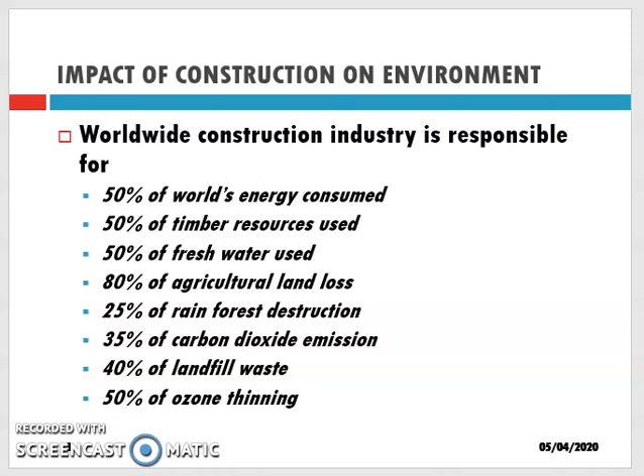Sustainable construction is the adoption of materials and products in building and construction that will require less use of natural resources and increase the reusability of such materials and products for similar or same purposes, thereby reducing waste as well. Sustainable construction or building also enhances the resilience of the industry, as such materials are readily available in the world market. Sustainability means a lot in construction business.

It means ensuring that resources are being used in an efficient way in our projects. It means considering the environmental impact that are created by the way we source materials, the processes we use to get the job done. It means understanding our projects not just regarding the bottom line and the benefit to our businesses, but also in terms of the impact to the environment, the community, and the world.

The simplest way to understand sustainable construction is concerning who are the stakeholders in the given project. If your firm is hired to construct a building, there are already several stakeholders involved: the client, your firm, and the local government that regulates construction in the area. They are all stakeholders, and they will influence the process and outcome of the project.

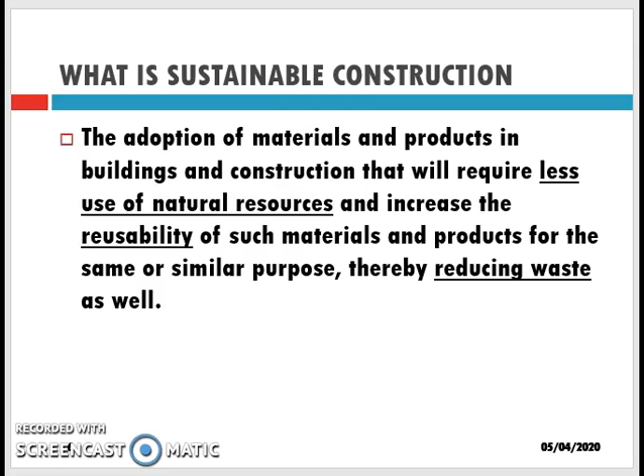Sustainable construction means that there are more stakeholders at play than just those putting money into the project. Conventional construction methods employed in refurbishment projects rely on the assumption that there is plentiful supply of resources, many of which are in fact in short supply and hence more expensive. Alternative approaches to construction seek to minimize environmental impact by applying the principles of reduce, reuse, and recycle.

Primary drivers behind the success of a sustainable refurbishment project include the following steps. Sustainable design approaches: sustainability commences at the design phase of a building for new construction as well as for refurbishment projects. Sustainable design concepts must be consciously included in the refurbishment. Designing major renovations and retrofits for existing buildings to include sustainable design attributes reduces operational costs and environmental impacts, and can increase building resilience. We will discuss that in one of the chapters later.

Sustainable materials: environmentally friendly materials, also known as green building materials, are those for which production, placing, and maintenance actions of low environmental impact have been achieved. They have to be durable, recyclable, and reusable, including recyclable materials in their compositions, and have to be from local resources as far as possible. We will again look into that in closer detail in the next few slides.

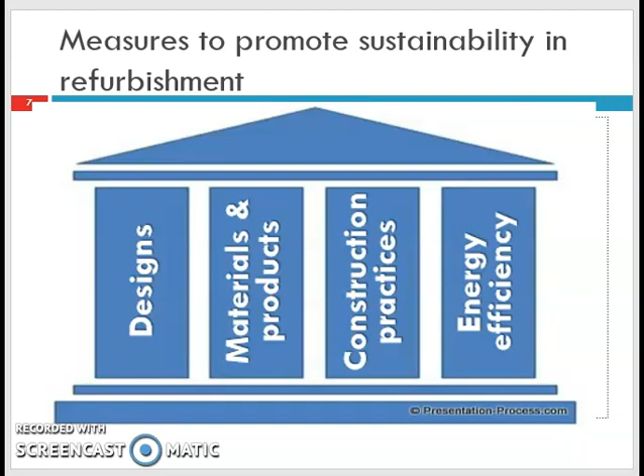Construction, including refurbishment, can have extensive direct and indirect adverse effects on the environment, the community, the economy, and society. Sustainable construction practices seek to reduce this impact and have the following benefits.

Energy efficiency. Sustainable buildings have unique construction and design features to enable them to be efficient, especially in conserving energy and water usage. For example, having solar energy systems and natural lighting provisions. Furthermore, sustainable building reduces water waste through the use of water-efficient plumbing fixtures and rainwater collection systems.

Health efficiency. People who live or work in sustainable buildings enjoy better indoor air quality, in addition to a number of other health and wellness benefits. For example, sustainable building materials are free of cancer-causing substances and harmful toxins.

Cost efficiency. Since operating and maintenance costs can account for nearly 80% of the lifetime cost of the building, reducing this cost by incorporating sustainable measures can drastically improve the overall cost efficiency of a building, especially for businesses in the industrial and manufacturing sectors. Reduced operational and maintenance costs means big savings can be invested elsewhere, such as higher employee wages, service improvement, or product development.

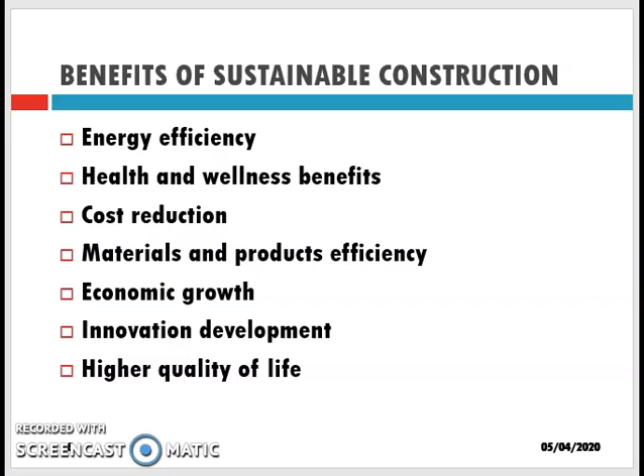Let's discuss sustainable designs for refurbishment. The main objectives of sustainable design are to reduce or completely avoid depletion of critical resources like energy, water, land, and raw materials; prevent environmental degradation caused by facilities and infrastructure throughout their life cycle; and create built environments that are livable, comfortable, safe, and productive.

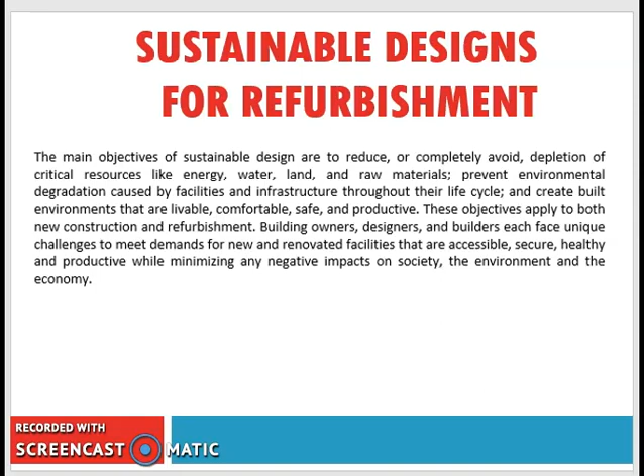These objectives apply to both new construction and refurbishment. Building owners, designers, and builders each face unique challenges to meet demands for new and renovated facilities that are accessible, secure, healthy, and productive, while minimizing any negative impacts on society, the environment, and the economy. The principles of sustainable design for refurbishment projects call for the project consultant's creativity and initiatives in the following issues.

Firstly, optimize energy use. Currently, the vast majority of energy used in buildings is from non-renewable fossil fuel resources. On the other hand, the building sector also has the highest potential for energy efficiency. With rising demand for fossil fuel coupled with uncertainty over the availability of fossil fuel in the future, rising concern...

...over energy security, both for general supply and specific needs of facilities, and the potential that build-up of greenhouse gases may be causing undesirable impacts on the global climate, it is essential to find ways to reduce, increase efficiency, and utilize renewable energy sources in all types of facilities. Improving the energy performance of existing buildings is important in increasing energy efficiency.

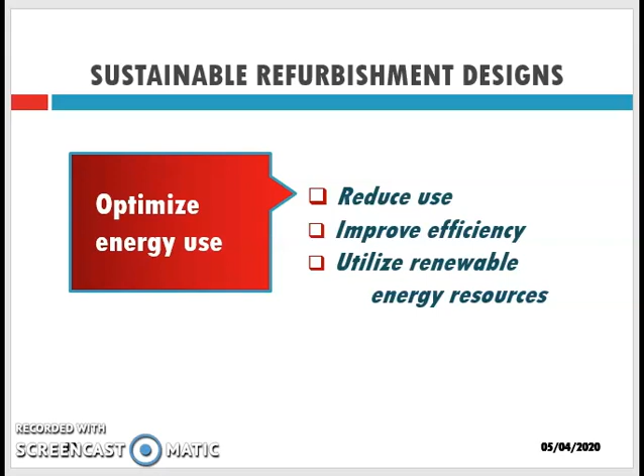We also need to look into protecting and conserving water. One critical issue of water consumption is that demand on water exceeds its ability to replenish itself. To the maximum extent possible, facilities should decrease their need for water by increasing efficiency.

Once efficiency has been optimized, facilities should maximize the use of water that is collected, used, purified, and reused on site. Through the collect and treat strategy, this will do little to reduce total water volume used on site, but it will minimize treatment and transport losses as well as reduce the overall energy required for processing and conveyance.

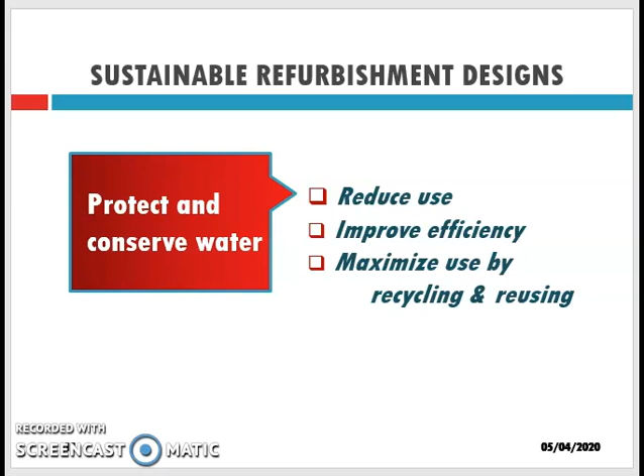Furthermore, potentially toxic chemicals are used to make water potable. The environmental and financial costs of sewage treatment are significant. While the world population continues to grow, consumption of natural resources will continue to increase, and the demand for additional goods and services will continue to stress available resources.

It is critical to achieve an integrated and intelligent use of materials that maximizes their value, prevents upstream pollution, and conserves resources. A sustainable building is designed and operated to use and reuse materials in the most productive and sustainable way across its entire life cycle, and is adaptable for reuse during its life cycle.

The materials used in a sustainable building minimize life cycle environmental impact, such as global warming, resource depletion, and toxicity. Environmentally preferable materials reduce impact on human health and the environment, and contribute to improved worker safety and health, reduced liability, and reduction in disposal costs.